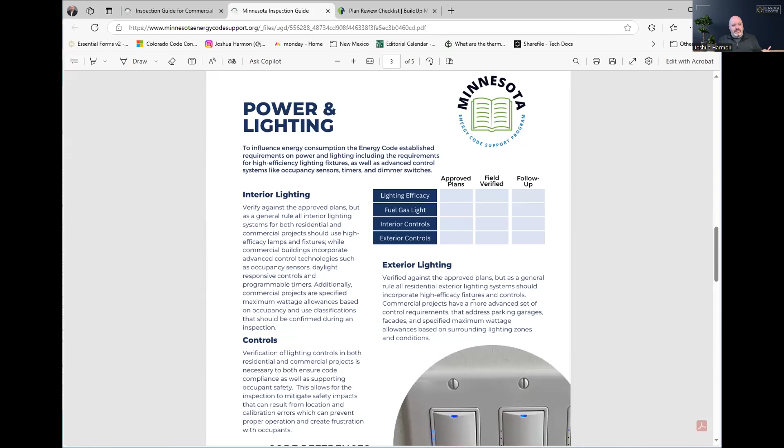But again, there's a variety of different inspection guides. Let's look at this one here - again, the visual inspection guide. This one's specifically for power and lighting, and it would give you some ideas, some things to look for associated with the power and lighting requirements in the code. So the one that I think we will kind of reference - not necessarily go through piece by piece - is going to be this guide here on insulation.

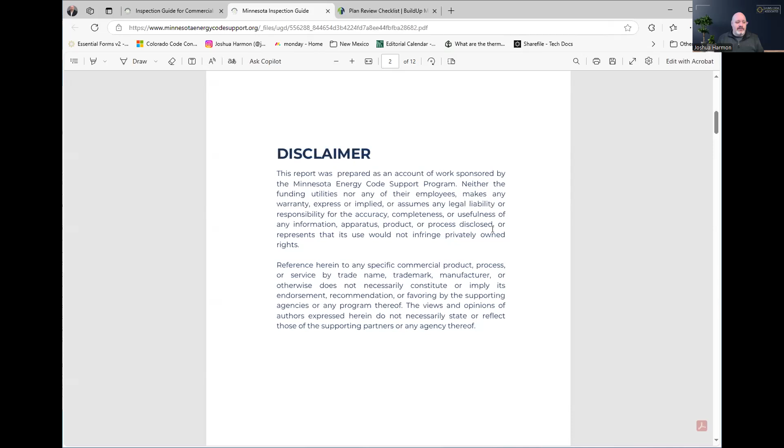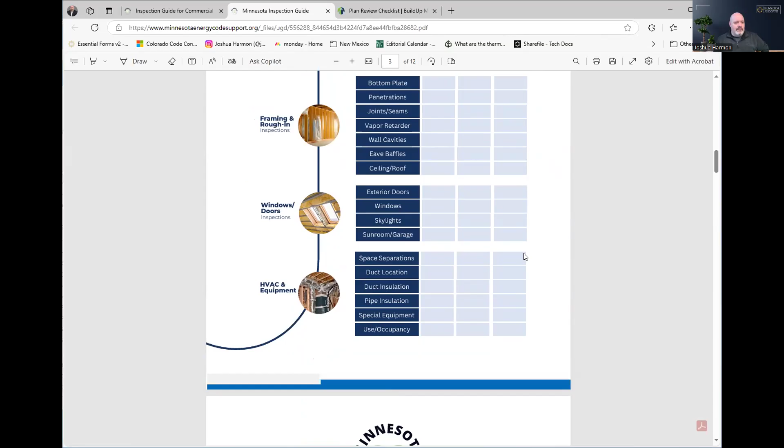Again, that's going to be a document that you can download, you can print off. We are working on getting a handheld, pocket-sized version of the entire series of documents. That way you can have that and take it with you out on inspections, give it to a contractor, so they have a better idea of what you're expecting to see when you're going out to do a foundation inspection or framing. You're looking for the wall cavity or windows, duct insulation, pipe insulation, verifying the use of a space. We've talked about that a few times, and we'll get into that here today, but again, it gives you some ideas of things to look for in that process.

So getting back to what we were here to talk about at the beginning.

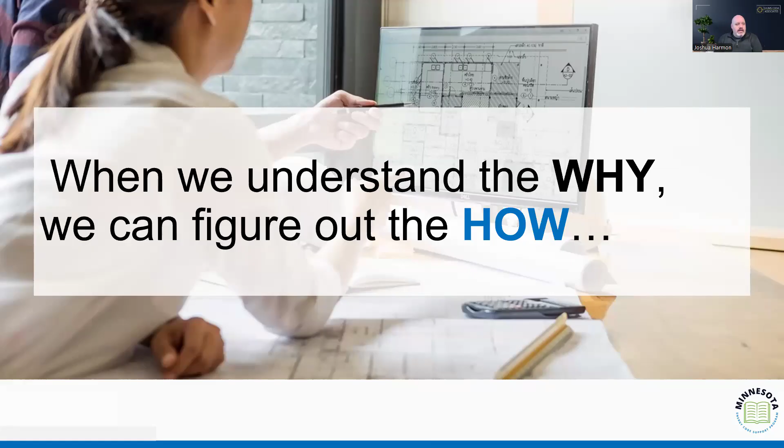One of the things, obviously, you hear me say it all the time - one of the things that we like to do is I like to remind us why we do what we do, right? And recognizing why we do it helps us better accomplish it, whatever the code requires. So when we think about that why, we understand that the reason we have an energy code is because we're looking to control the amount of energy being used, or the amount of heat loss, that's associated with our mechanical systems, illumination expectations, and climate control within our buildings. We're trying to build a building that has that control in it.

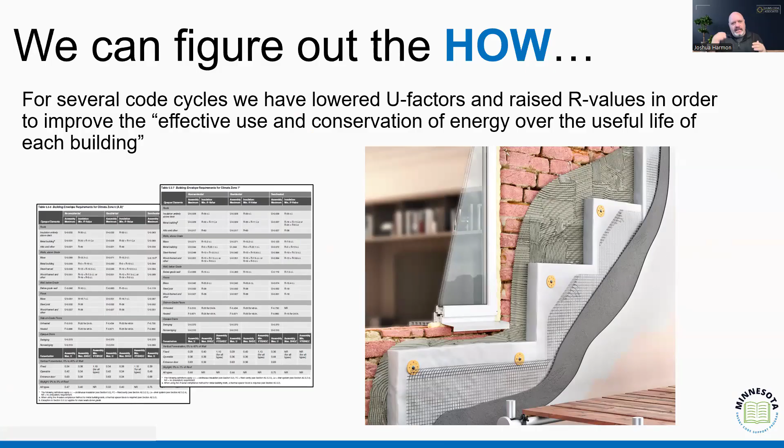And the one thing we always think about every time we talk about energy code, the thing that always gets brought up by home builders associations, by the public, by most code officials, is this concept of insulation - that we keep modifying these and changing the U factors and R values on a table, and that's how we're conserving energy. Well, when you really look at it, and again this is Climate Zone 6, when we look at how the energy code has changed over time, it's not significant when it comes to the amount of insulation we're expecting.

We can see that, again, 38 in the 2009 IECC. By the time we get to the 24 commercial energy code and the 2022 90.1 standard, which I think is going to be the backbone of our future commercial energy code, that number doesn't change. We don't see huge changes. We do see a change from the 18 IECC to 24, from 10 to 20 in our slab insulation. But when we look at all the other variables between the current energy code and the newer version of the 90.1 standard, really the only thing that changes in the insulation is this concept of the mass wall.

Because what we've recognized over time is that it's less a question of what we put in the wall, but how well we put it in there. And it's about making sure from the beginning of the process, from plan review, that we focus in on this concept.

That if you're going to do it - and again, this is something my parents taught me as a kid - if you're going to do something, do it well, right? From the beginning. If you're just going to lackadaisically do a project or do a sport, then don't waste my time. I am probably the worst parent in the world, because that's what I tell my kids to this day - if you don't want to do it, don't waste my time.

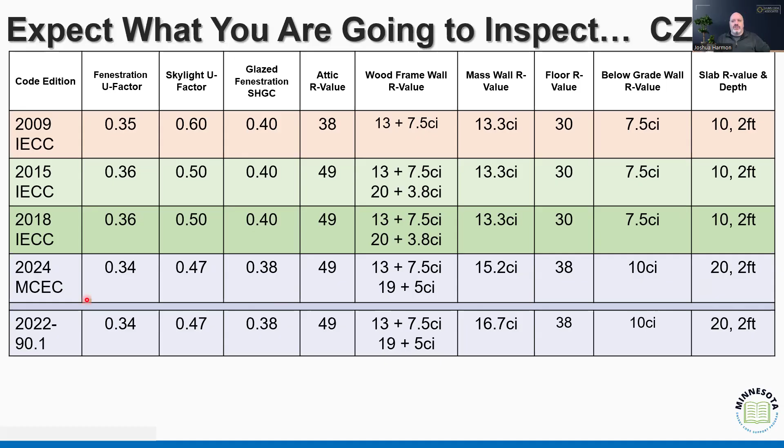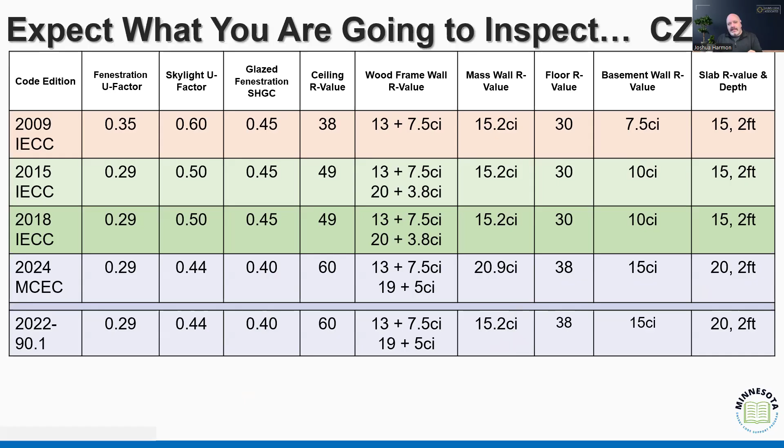So again, the insulation is not so much that we're increasing it, improving it, adding to it. It's that we're expecting the building will better use the energy because we've provided proper control over our conditioned space, right? The window itself does not use energy. The insulation, the drywall, the exterior cladding do not use energy. But what they do is provide that level of control, that level of separation between the exterior environment, which we know can be temperamental, and what we're trying to accomplish inside.

Now, I saw Chris on here earlier, and I keep picking on him, and I apologize for that, Chris. I don't mean to pick on you in this context, but I think the work Chris is doing in the mechanical tag is really the most important thing we do when it comes to the building itself. We stopped arguing about what is a 2x4 and what is a 2x6 years ago. We allow for mechanical designers and our architectural designs to be different, whether we use wood or steel or heavy timbers and those kinds of things.

But the thing that keeps being discussed is the concept of the mechanical system. There's only so much you can do with light bulbs, only so much we can do with switches for lights. But the mechanical system is the one thing that affects our buildings the most, whether residential or commercial. So giving the best control envelope to that building allows us to then have the flexibility to design a mechanical system that heats and cools as we see fit, in the conditions that we want.

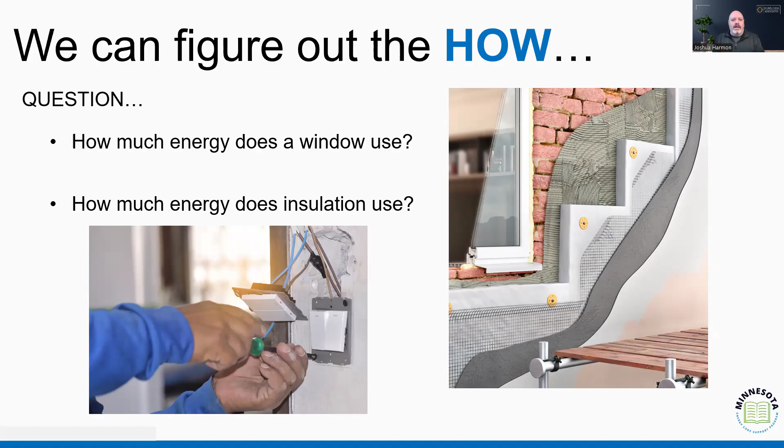And so it is that relationship that makes insulation so important. It's why that building thermal envelope is a pillar of energy code compliance. And when we think about the future of the residential code, again, there's only so much you can do with insulation. There will not be an R100 in the wall. That's not needed—we've seen that in code development. There's a place where diminishing returns kick in. And so we see things coming into alignment to where this is probably the envelope you'll have forever.

And in most projects, that's the reality. So it's really understanding that relationship and where plan review comes into it that I think is the fundamental thing we need to accomplish today. And then, like I said, I have a bunch of slides, so feel free to ask questions. We can jump around, or I'll barrel through it.

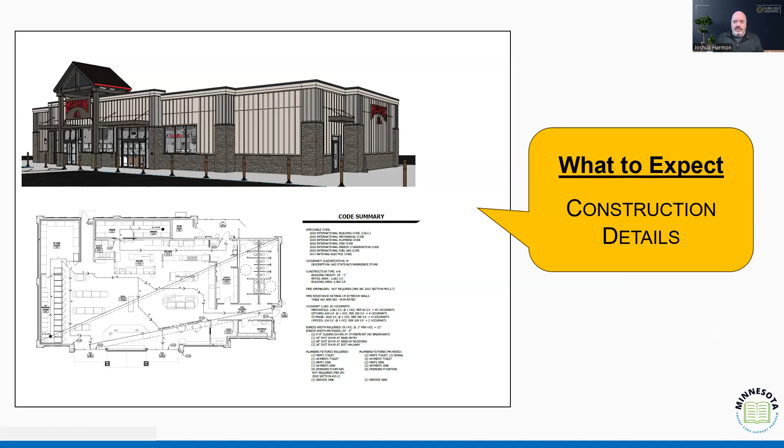So a project starts with this idea of what are we expecting in our construction details. We know the code, whether we look at 1305 or here in 1323, we have certain expectations. Now, one of the things I think fundamentally needs to be reinforced is that we need to identify the testing and testers from the beginning. The code tells us this—this is part of that process.

If I know a test is coming, then I'm going to be prepared for it. If I know what that test is, then I can think about it. If I know who's doing it, I know when to call and who to call. So these are concepts that we understand. And as plans examiners, that's one of the opportunities for us to say, what is the standard we're testing against? Not just, yeah, we've picked this firm to do our testing—well, what testing are they doing? Is it matching it with a table or matching it with the energy code, as far as maybe something as simple as air changes per hour?

Or is there another standard that we're using? Is it a 380? Is it an 850? Is it a RESNET, an ICC, is it an ANSI? And what is it that we're actually testing against?

Now, I've told you before, my wife is a teacher, and one of the things we talk about all the time is not just testing to test, but testing with a target in mind. What is the outcome that you want, and how do we get to it? And so again, that's where we see this role as fundamental in the beginning of plan review.

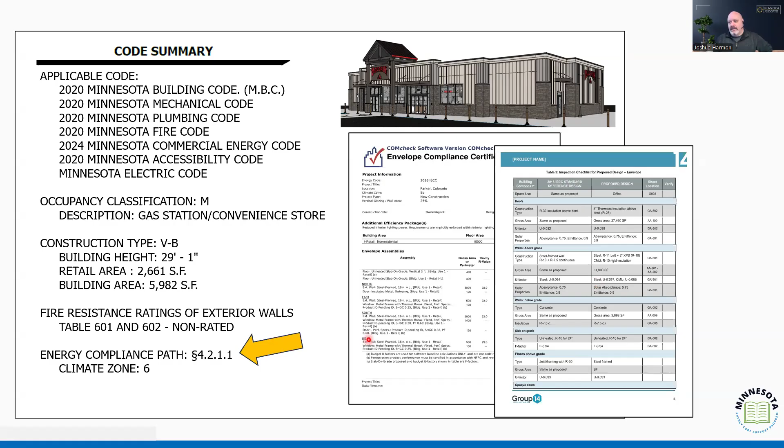So I start to question things. And one of the things I will always send a comment back on is making sure I have adequate understanding of the compliance path. Please specify that compliance path, because I'm basing this review on a prescriptive compliance using the R value for your envelope compliance. If that's not correct, you need to make that correction for me, because that's what I'm assuming, since I don't have all of the details in this. This just tells me there are compliance paths.

We saw that section here, 4.2.1.1. You're just telling me it's a new building. That's all you're telling me with this number. So I'm going to need that extra little bit of information.

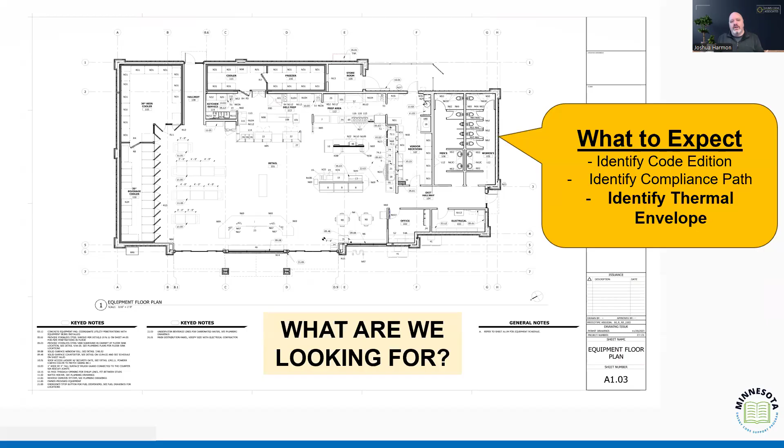So once we've gotten in, after we've passed beyond the compliance path, now we start to identify that thermal envelope. And what are we going to be looking for? There are certain things we've talked about, things we know we're looking for in insulation related components. The first thing we're looking for is that envelope location, because we're going to see that envelope may be very simple or it may be very complex.

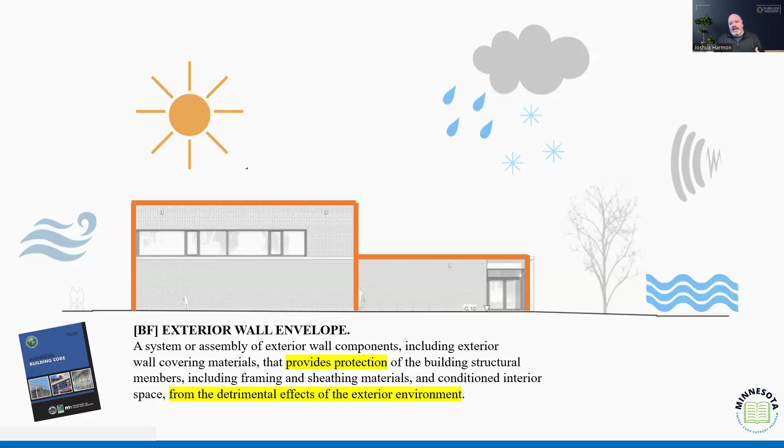Now, that envelope is defined by the building code. The exterior wall envelope is designed to protect us from the detriments of the exterior environment. That's the envelope we talk about, the wall envelope that protects us from rain, from snow, from the wind. When we go to the energy code, that's when we take it that extra step further. And I hate the term building envelope. I prefer the term thermal envelope.

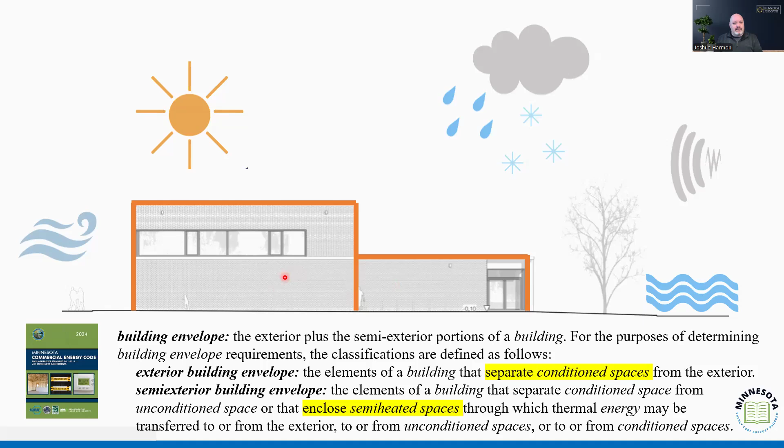You'll hear me say it a million times that way, because it's a thermal envelope that allows us to separate conditioned spaces. So if I have a conditioned space versus a warehouse that's semi-heated, that thermal wall, that thermal barrier, that thermal envelope separates the two and allows me to have control over what's going on. When we look at a large building, the building envelope is that structural component that separates and carries loads and separates exterior from interior spaces, occupiable or potentially habitable space. That thermal envelope is going to separate it even further into what is conditioned and what is not, and how am I controlling these things?

Because what we'll see in the code tells us that we need to recognize and separate these things. But more importantly, it gives you, as the building official, the authority to say yes, this is a semi-heated space, this is an unconditioned space. It's not just you said it, I have to agree to it, because I need to know what it is. Because if I don't have that level of control, we all know what happens.

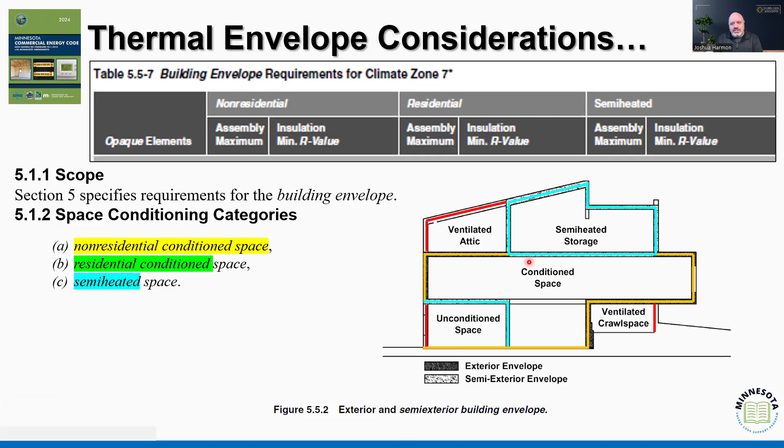So again, we may have a building that has different types of conditioning, and that's where the thermal envelope is important to understand. Beyond that, it also allows us to recognize different types of functions within our designs, right? We know that if a system is completely within the building's thermal envelope, then we have relaxed expectations regarding the insulation of the duct systems, regarding the duct leakage associated with the duct systems, right?

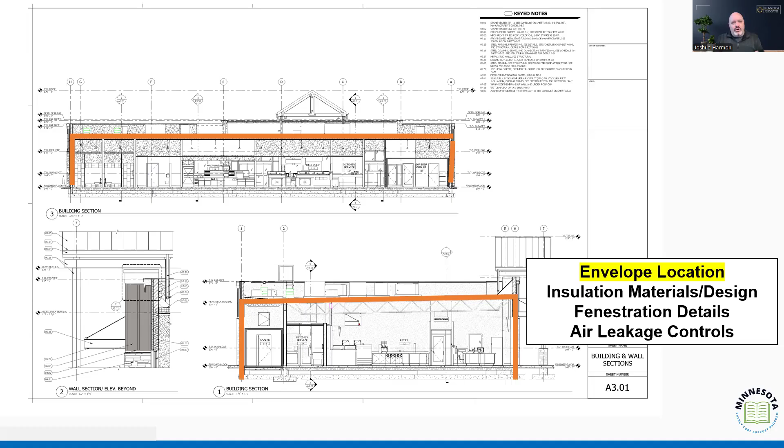If this envelope dips down, curves around, does some things, now I need to start thinking about things. Where are my different components? Where are my sprinklers in relation to this thermal envelope, right? And so again, I need to know where that envelope is going to be. After knowing the envelope, I need to start thinking about what makes the envelope, right? Now, I do want to point out that the code addresses envelope alterations, right?

Is a parking garage considered a semi-heated space? That's the beauty of this code, right? That's up to you, right? Because the space, I'm going to go to the one that's actually got the state seal next to it, may be designated as either semi-heated or an unconditioned space only if approved by the building official. So again, depending on what they're trying to accomplish in that space, it may not be, right?

You may have an environment where you're going to have a little bit of controlled heating. I typically see most places have a semi-heated. They have a sprinkler system down there. They need to maintain, again, above freezing, right? And so you may have parking garages that qualify. It just depends on the scenario, and that's why it gives you the authority to say this is conditioned or semi-heated space. It may be a completely different zone as well.

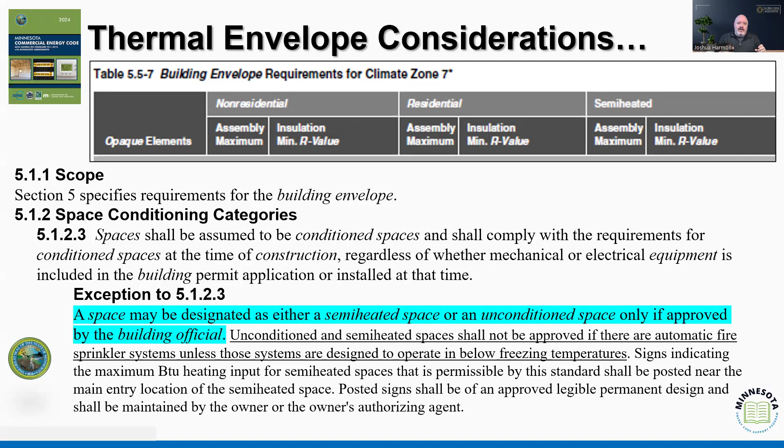You may call it conditioned, and it's just not conditioned to 65 or 68 degrees, right? You may identify it that way. But again, that's where the beauty of the system is, that you make that determination, and in the design, they're making that claim, right? Otherwise, I would treat it based on what's going on in it. Is this just a parking garage that goes below, and then there's no access, or is there access?

Well, this is going to have some kind of an access area, and so we're going to have stairs. We may have some storage. We may have some things down there. So this would, for me, probably be a semi-heated space up to a certain degree, and maybe there's an overhead door. I was in Arizona last week, and when I went to a parking garage, they had the overhead door, right?

If you go to the Hilton down in St. Paul, they've got an overhead door that's not just a chain; it's actually acrylic panels to create a semi-heated space, right? So that would be a semi-heated space. Digression. Good question. Answer live.

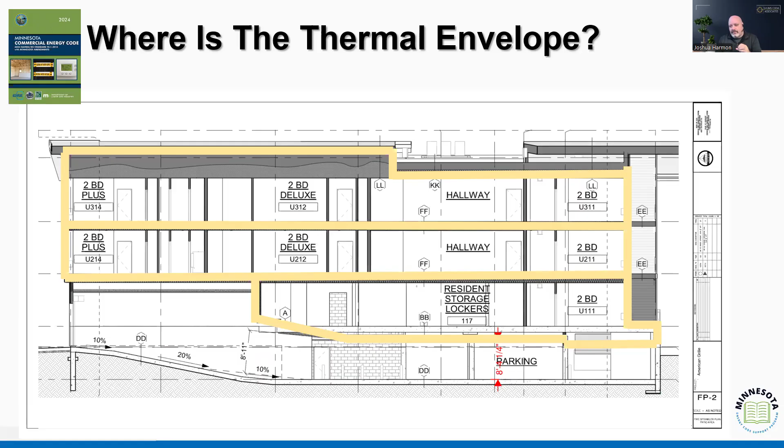So when we start thinking about that in that context, remember there are certain things that we can make alterations to. The code identifies that alterations shall comply with the requirements of Section 5 for the insulation, the air leakage, and the fenestration applicable to that. I had a building heated to about 45, 50 degrees with precast concrete above. What would you ask for to separate the garage from the residential units above? So what I would tend to think, yes, there was. Let me grab this here.

I think again, it would be some level of vapor barrier, right? Maybe the thermal envelope has to go across. If we look at what the table says, we'll zoom in. You're in 6, right? So that floor would require an R38 to separate the parking garage from.

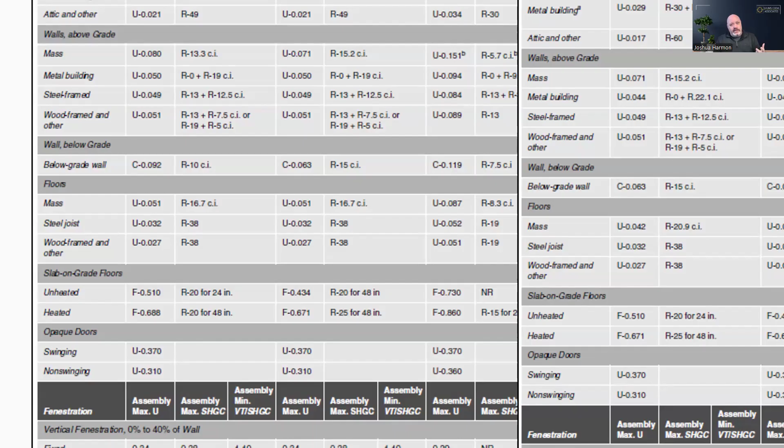Now you might be able to get into, again, an unheated, you might be able to go with this U factor or a C factor, because we're talking about concrete, right? And so you might be able to get a thermal rating on the concrete plus some level of rigid foam insulation to provide a level of separation.

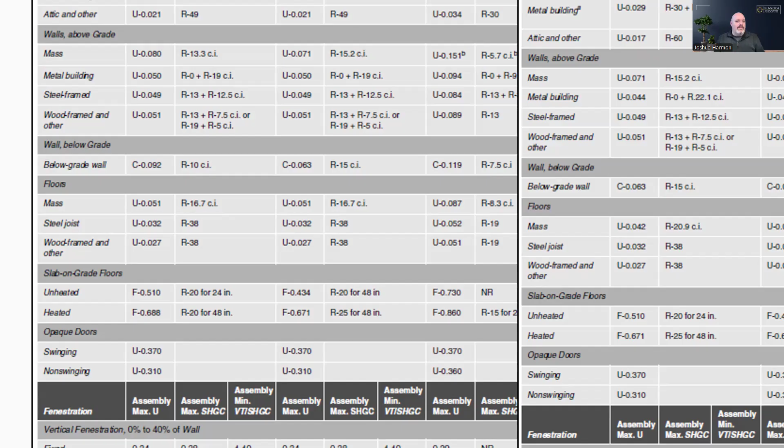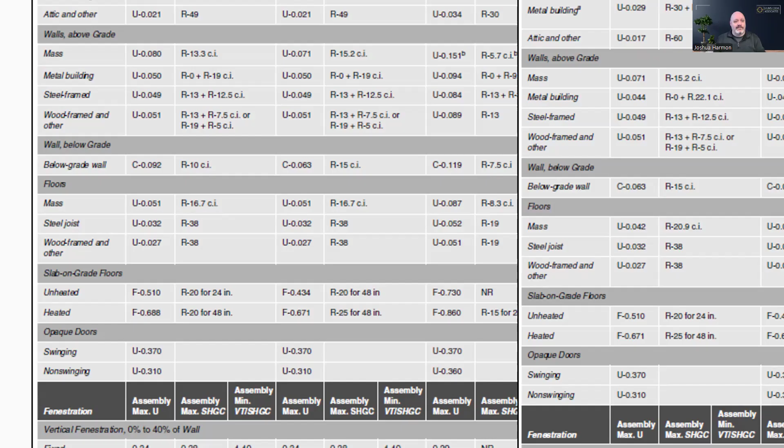If you don't get that, that's why you see in some parking garages the stalactites start to form where the moisture is dripping through because they didn't provide proper thermal separation. And then that water, as we all know, will eventually freeze and crack and delaminate or spall that concrete. And again, I've been the guy on the other side of the parking lot who gets presents every once in a while in my city vehicle.

Trish, did you have a question? I've unmuted you. If you figure out the thing, jump in anytime you have a question.

But yeah, so that's what I would say, Clint. I want to see what is the thermal resistance of that precast concrete, I want to see what is your vapor barrier that's going to prevent moisture from accumulating between that semi-heated space and that heated space that's coming from the concrete, right? Because that concrete's going to get natural conductive heat.

Now you may put some level of thermal barrier at the top of it to try to, I use the term shunt, right? When we think about the heated slabs, when we talk about heated slab on grade, the code requires that we also include, and I've got it in one of these slides, that R5 continuous insulation underneath it, right? That R5 is not preventing heat diffusion into the ground, but it's going to attempt to redirect and shunt it up. Over time, you're still going to lose heat to that situation.

Oh, okay. No problem.

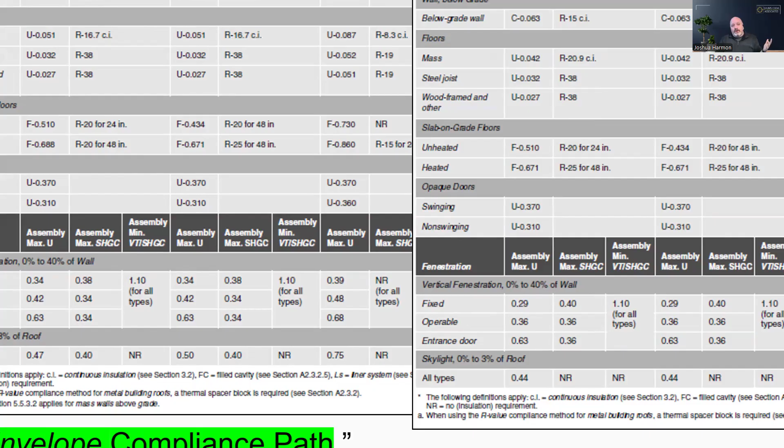So again, that's how I would deal with it from a thermal envelope perspective. And we've got a couple different examples. If you need one, we've got a 5-story multifamily with underground parking for each unit and how they did that and what those expectations were on those designs. But again, if we're looking at an alteration to the envelope, it may require that we look at insulation, fenestrations, and air leakage as part of that alteration.

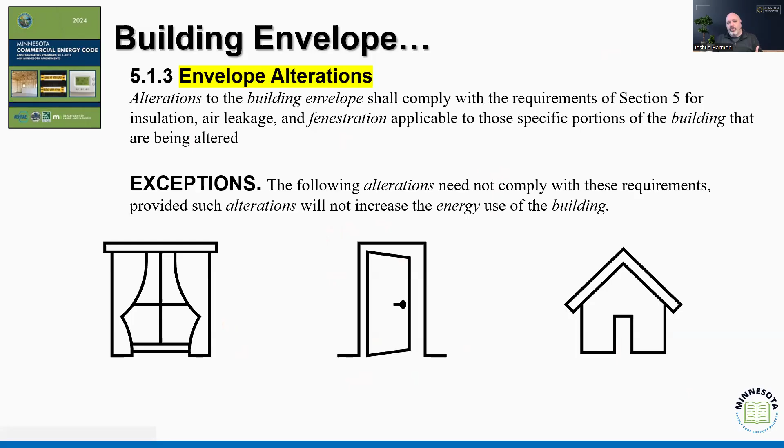But the code always gives us exceptions, right? It says that the following types of alterations need not comply with requirements for alterations when they do not increase the energy use. That's going to be replacing windows, replacing doors, and certain types of envelope alterations. Those exceptions include the installation of storm windows, replacing glazing using an existing sash, and replacing fenestration where we're not exceeding 25% of total fenestration area, right?

So there's certain things that we can do, but if we're going to go all in and replace all the exterior windows, or we had a car run into your building and now you have a hole. Guess what? You're going to have to repair it, right? And then we're going to have to think about what type of window you're putting in. Make sure that window meets the requirements of the code.

One of the things I had the biggest problem with, and I've used this example before, in the city building I worked in, my office window had a crack. When they went to replace that window, it no longer looked like the other windows because it was installed based on the new code. Everybody else had this nice dark tint, and then I had the shiny silver one right in the middle, right?

What about the dwelling unit over the overhead garage door? So Dale, I would probably say we would be looking at what type of door controls are there. You can get with the door manufacturer. And so you're going to extend that thermal envelope over the sill, over the top plate, and then go back up that wall. So that overhead door should exist underneath our continuous thermal envelope, right? So if we think about it that way, my envelope is here.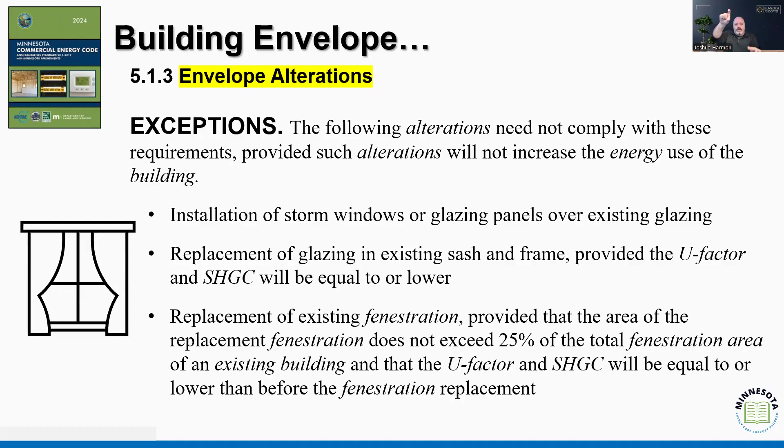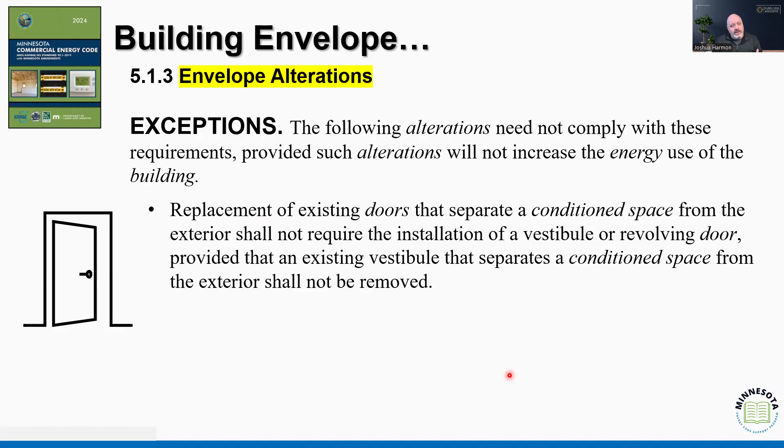So we've got the window, we've got the door, right? Replacement of existing doors that separate conditioned space from the exterior shall not require the installation of a vestibule or revolving door as long as that existing vestibule separates the conditioned space from the exterior, right? So again, just replacing a door doesn't mean we got to install a vestibule, right? I go with the word common sense. We use very little of it in the building code. This is one of those little pieces.

So that third option is, again, when we start talking about alterations to the roof, the wall, or the floor cavities, right? If we take the siding off and we don't create a cavity, we don't have to install insulation to fill that cavity, right? If we're doing a membrane where there is no cavity to fill, then we can't fill a cavity, right? If I'm doing a roof recovering, I don't need to do anything. If I'm replacing that roof and now I'm exposing areas that would otherwise require insulation, then I would maybe require that insulation. It gives you the ability to have that exception.

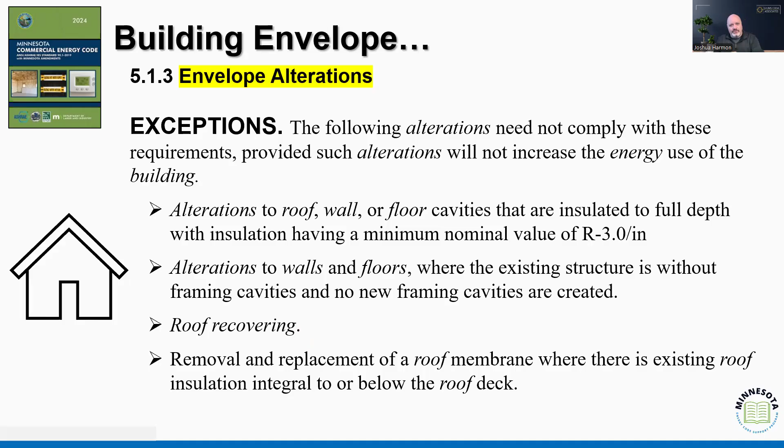That's the more important part. You have the ability to grant exceptions to alterations associated with the building envelope. There are going to be 100 different reasons why you would or wouldn't, and the code says you figure it out. Does it fit within the confines of one of these identified exceptions? So I threw that in there just to get everybody riled up. That's what I like to do.

You know me. And so with our building thermal envelope, obviously there are mandatory provisions. We know that we have to follow these mandatory provisions. The first one is insulation, and it tells us that we got to install it to the requirements of the table, right? And then it gets to the fenestrations and doors. We know that's part of our overall thermal envelope. We'll talk about that later. Air leakage is going to be another conversation. But insulation in and of itself sounds like a simple concept: you have to have insulation that meets the requirements of the table.

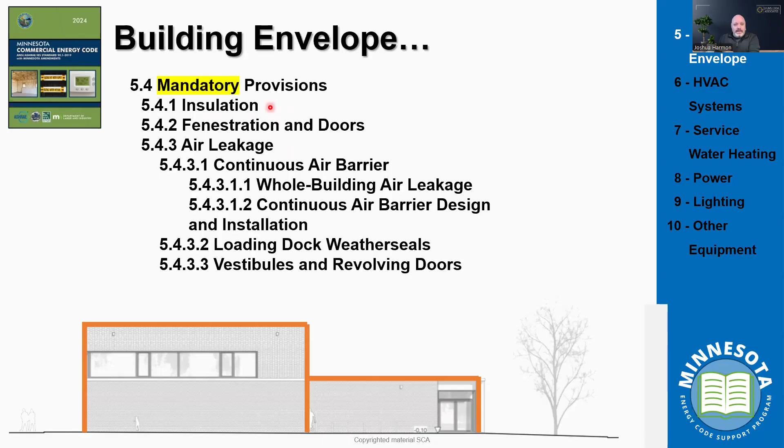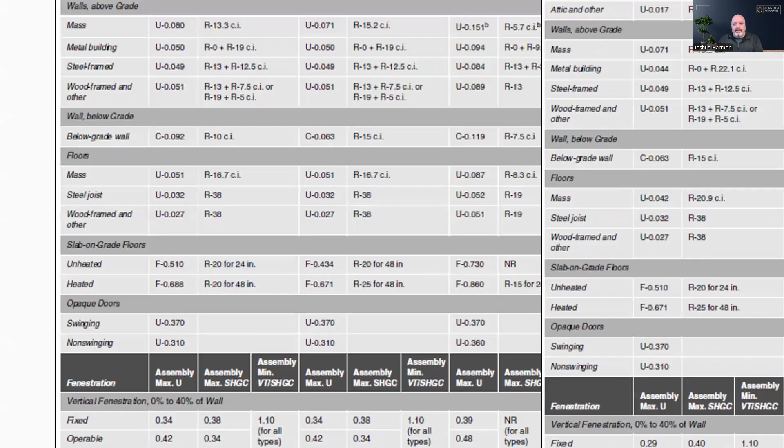That is done through either the prescriptive compliance path, right? Follow the table, or the building trade-off path. And that prescriptive path is, again, follow the table. Jump into it and say, okay, you're going to have a steel frame, a steel joist floor. I need an R38. If you're going to have a mass floor, if I've got a concrete floor, then I need an R16.7 continuous or a U-factor of 0.051, right?

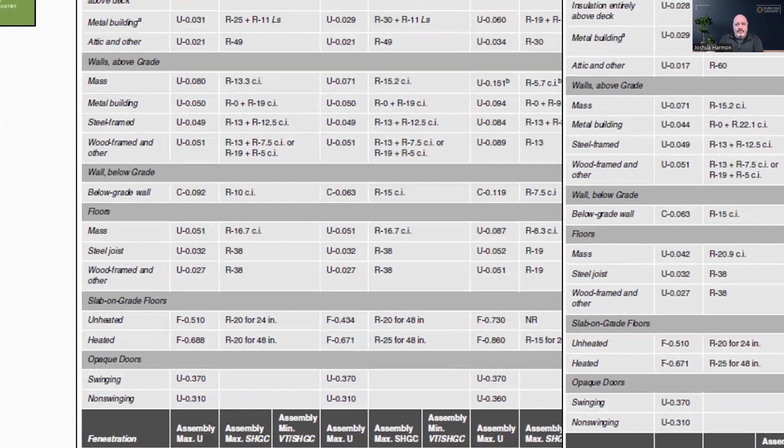One thing that I would always suggest, and we'll talk about it here in a second, is jumping to some of the different manufacturers. If it's precast concrete, they know exactly what the U-factor is, right? That's what makes them an association. When we start thinking about what's identified within the code, it's these components: the roofs, the walls above grade, the walls below grade, the floors, the slabs, the doors, the fixed fenestrations, and the skylights. And then we start to isolate within them that concept of attic or other.

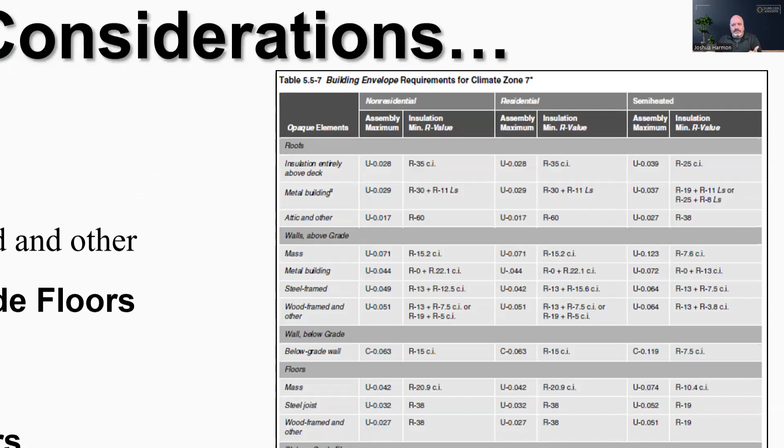If it's not a metal building, which we talked about a month ago, which was metal skin with metal siding, metal skin with metal framing equals metal building and heavy metal, right? So if we have a metal building, we have expectations, and we know what those are. That's going to require that liner, right? That R30 plus an R11 liner, because we need that liner for thermal separation.

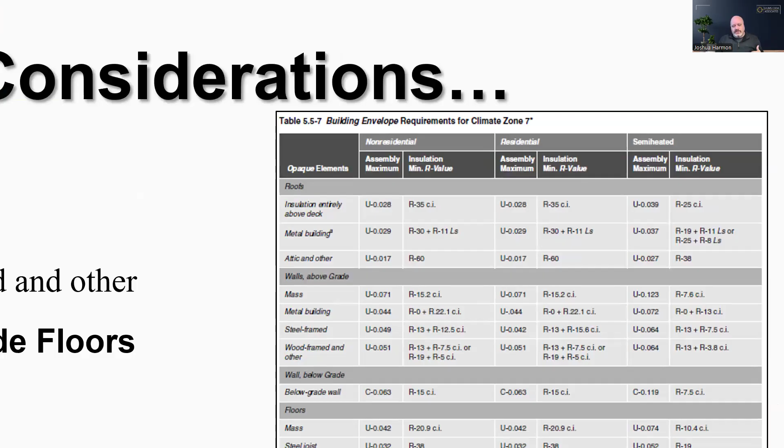If we have that insulation entirely above the deck, that gives us a whole other number, right? We're usually, I think that's an R30 for most, 35 in zone 7, 30 in zone 6, right? And then we have the attic or other.

So again, we would take those different components and say, what are those components supposed to be? Prescriptively, the table says I need this number, either as a U factor or an R value. That alternative trade-off compliance path is the ComCheck or other.

Calculation for area-weighted U values, right? ComCheck is literally just going to take the math and do the math for you, saying this is the type of wall, this is what you're putting on it, what is that thermal envelope U factor, right? That assembly U factor. And then it weights it.

I think that's one of the things to make sure we understand. When we calculate an R value, it's individual, one piece of material. The U factor looks at the entire wall system and then averages cavity versus window versus stud, right?

Same thing here. So your percentage of window may be different in a different wall assembly. That's why when you look at your ComCheck, it has a wall system and it also has a window. Or you may have an elevation that has no windows. Great, right? That's what we're looking at. That's what this is doing.

All that math to say overall, this building will have an area weighted based on the amount of wall versus window versus other component, an area weighted U factor of X compared to our tables, right? So again, this is that alternative.

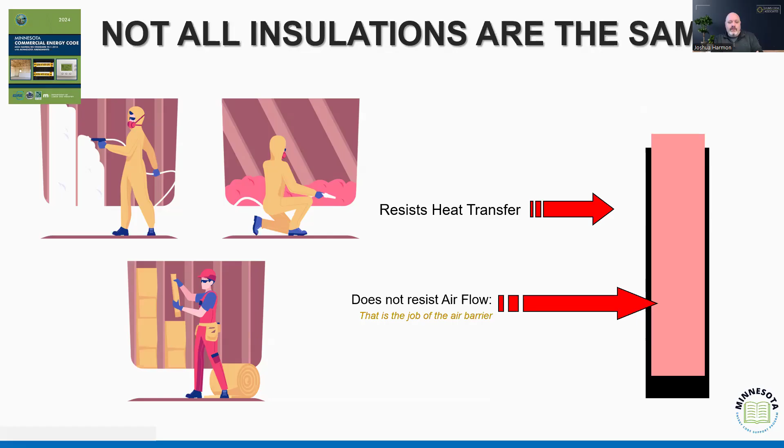And so the reason we have these alternatives is because we understand that not all insulation is the same, right? It all does the basic concepts of resisting heat transfer, but not all insulation provides air control, right? That's why sometimes we need an air barrier or a moisture barrier, right? And then sometimes we don't because of the selection of material.

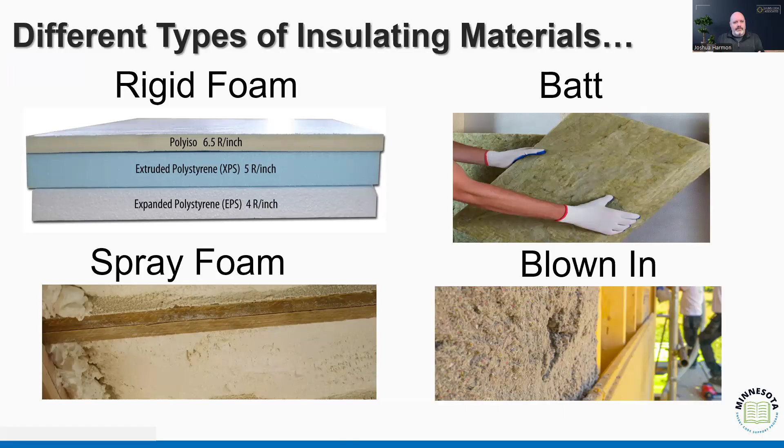Because different types of material, like our rigid foam, spray foams, batt and blown, provide different qualities, not qualifications, qualities, right? They're measured differently. There are different ways to measure. We can look at it as an individual R value, right? We can take the assembly as a whole using a U factor. Either way, we can calculate what is that thermal resistance, how much heat goes through this material over time.

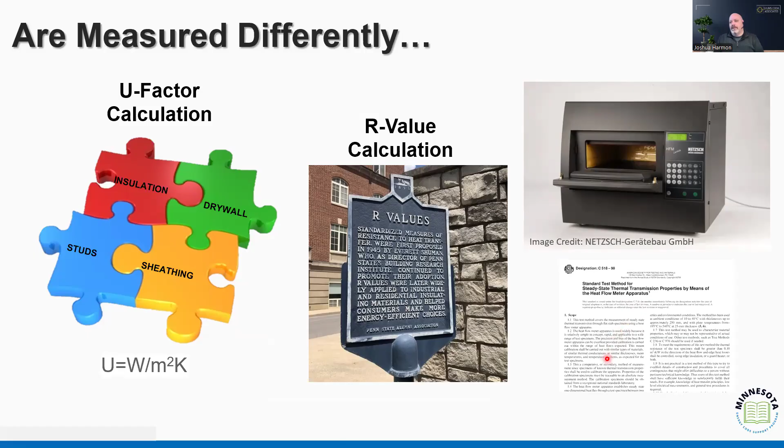And they do that through this little thermal transmission system, autoclave process, right? They can stick the material in, they run the computer, they run it based on the standard and say this much heat transfers in per inch over this time period. That's how we get that R value and the relative U factor.

These values can be measured. You can do this on the computer. You can do this with a book, with a piece of paper, right? We've talked about this before. The method of calculation is we're looking at all of these different assemblies, right?

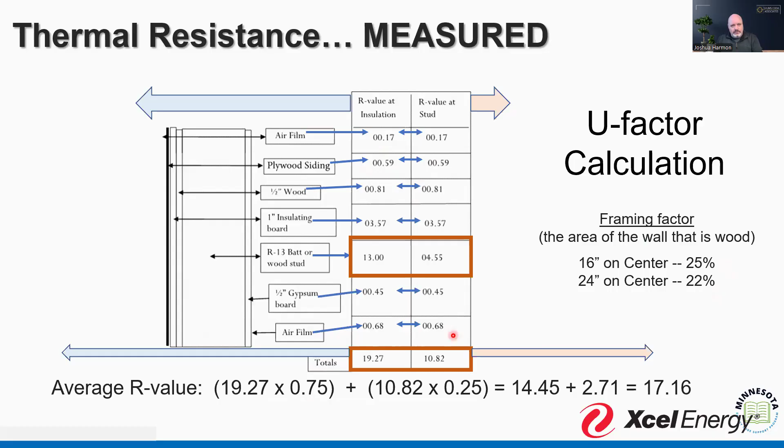If we're doing 16 on center or 24 advanced framing on 24 on center, that changes our framing factor, right? And that affects how much is wood, how much is wall, right? I got those back, wood, wall. And that gets us to a number.

Then we get down to this. So using that simple example of a 3.5 and a 13, we get a 0.058. Well, then we can start playing with it. We can start replacing that batt insulation, that number. And so if we increase it from 13 to 15, then we can see how that relative U factor goes down. So more insulation, less heat loss.

So this is thermal resistance. This is thermal loss. So the more we have, I usually say this, the bigger I get, the less I lose heat, right? So I'm going for a record here. But I can replace that R value in the cavity and see the impact. So we see here we got an R20. I'm going to use this as an example. R20 and 3.5 gets me to a 0.045.

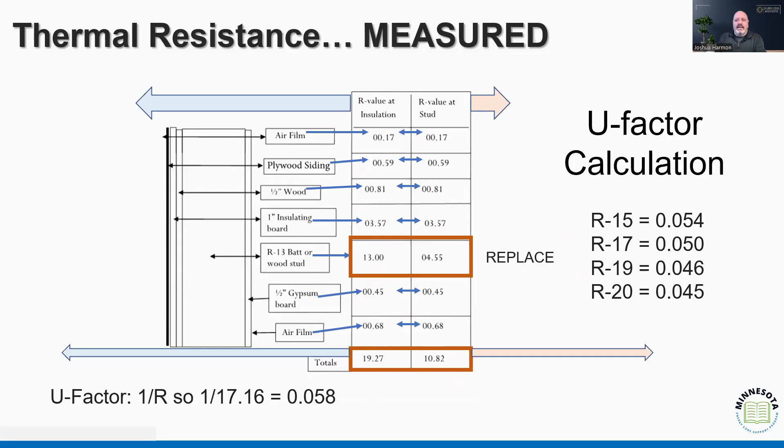You can also go the opposite direction and say, okay, keep your R13 batt insulation, just change the insulation board, the continuous insulation. And so we can start to change that number. If we go to an R10, we actually get more thermal resistance than if we went to an R20 in the back. So adding 7 here is roughly equivalent to adding 7 down there, in this particular design.

Let's say I'm designing or thinking about what I'm trying to do. I can go back to my table and say, this is a wood frame wall. I can either do 13 with 7.5 continuous, or I could do 19 with 5. If I'd gone with my 20 plus 3.5 from a prescriptive requirement, from an R value calculation, I still wouldn't pass. But I would be under the maximum assembly U factor.

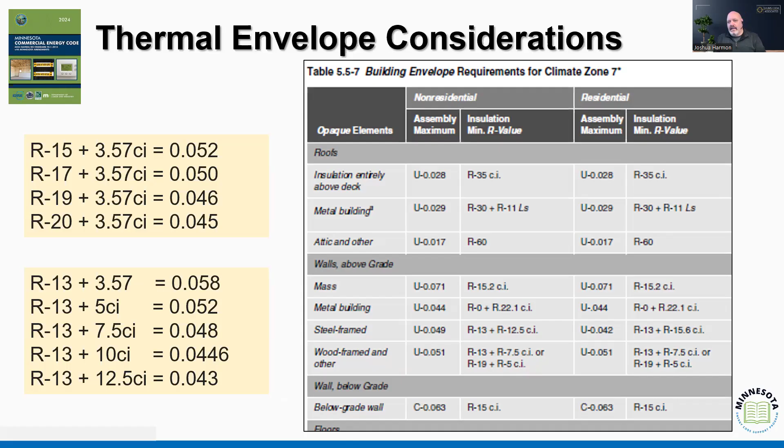So again, that gives me that flexibility. I can choose either the U factor or the R value, whichever one gets me into compliance. And again, those values are accomplishing the same thing. They're looking at how much heat is transferring through that material. And remember, not all insulation is the same.

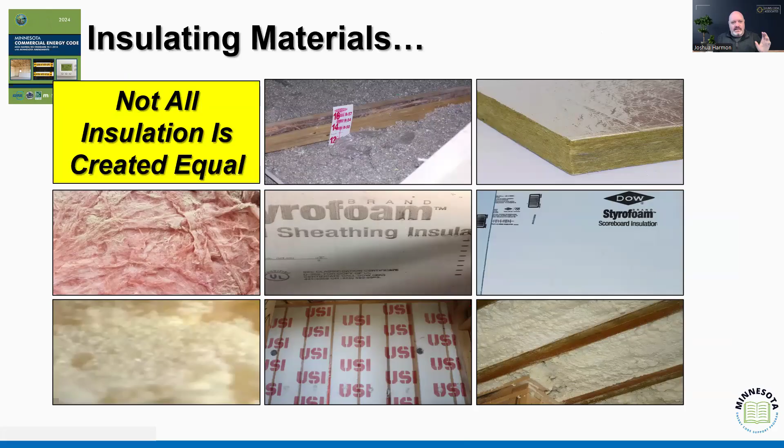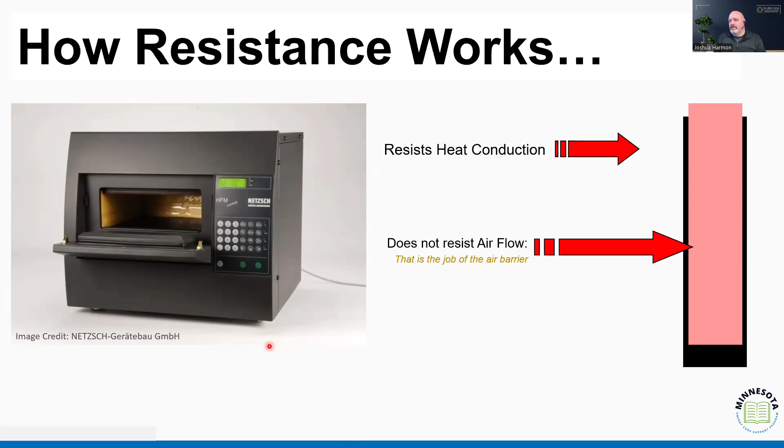Again, it has to be tested. And when we look at that testing process, I think it's important to understand that we can look at the testing parameters the same way we do with an ES report, or any other material that we start to evaluate. What was the evaluation report on this? What was it testing? Is this material going to perform the way we expect it to? Manufacturers provide a bunch of technical resources to assist in that calculation.

Again, if we're doing precast concrete, the Concrete Association will have that. ACI sent in my state a big, huge thing about how we need to incorporate fiberglass tensile fibers mixed in the concrete, because it provides added tensile strength and a level of thermal resistance. So the association generated the material that then we can evaluate and say, does this make sense in the best interest of our communities.

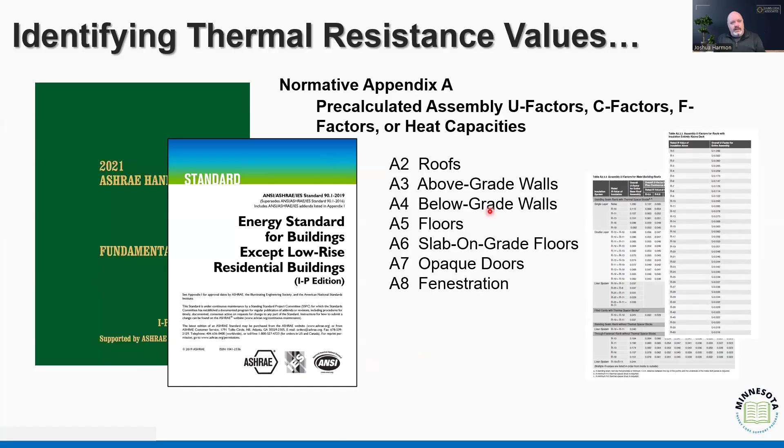So you can look at those resources. You can also identify resistance values through the standard itself. Go back to Appendix A. It's got a list of pre-calculated assemblies. So maybe there is a floor system that incorporates the thickness of the concrete, and again the addition of maybe some air barriers or foam board insulation. But remember, each one of these different materials has a different expectation, different qualities that may make it more valuable in a particular design.

And so that's where, as a plans examiner, I need to know what's going on. We're not just saying throw an R19 in the wall. What are you telling me, R19 insulation, or are you telling me R19 batt or R19 continuous? Because you, as a designer, may be thinking about multiple things, and I just can't say well, as long as it's a 19, we're good. I want to make sure that what my design is allowing is what my inspector is able to see and accomplish out in the field.

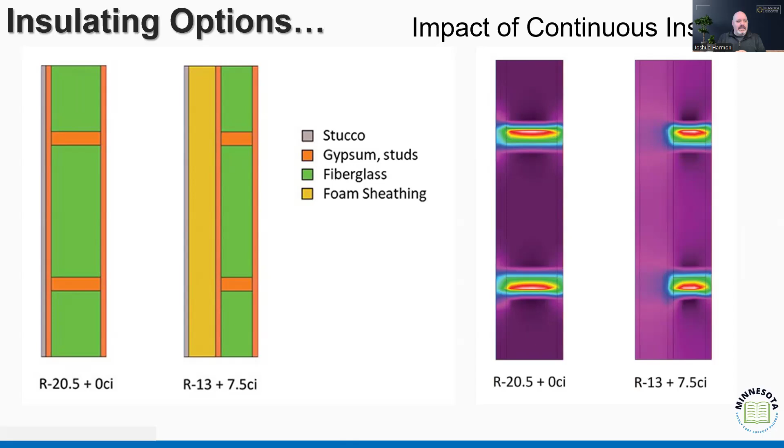And again, spray foam, we know there's different types, whether they're low density, medium density, high density. Low density is what we call open cell. Over time, it cures a little slower, so it opens up the cell and the gases evaporate, which then allows it to be filled in with air, making it less air impermeable. You can still get a good air barrier, but you have to install more of it than if you go with a closed cell. A closed cell cures faster, so it traps the gas inside the cell, and therefore you have that information. Are they not equal?

So the R factor and U factor are generally the same. Eugene, because the question is whether you use the R factor or the U factor calculations, are they not equal? The R value is looking at one piece of the pie. The U factor is looking at the whole pie. And so if I use the example of Taco Bell tacos, am I looking at the meat or am I looking at the taco? It's still meat in there, but am I getting the whole taco?

And how much better is the whole taco than just the meat, right? So they are somewhat related.

Now, the R value is what comes first. The U factor is a mathematical inversion of it, right? Except you're allowing that area weighted component. You're understanding this is part of an assembly versus an individual material.

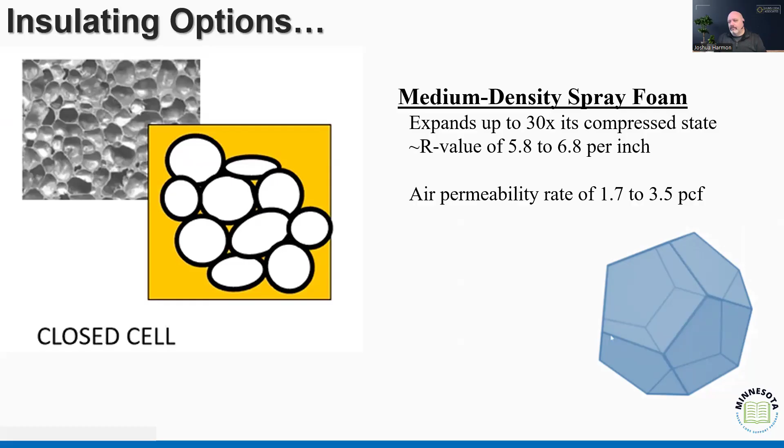So again, depending on what type of material, we want to make sure we understand, are we doing closed cell, open cell? They are different. They don't just taste different, they are different, right? And again, spray foam is something people are really trying to get a lot of because it has different versatilities that they may find more useful. But again, if it's looking to just be an easy filler for maybe a small area that doesn't want to be stuffed with batt, or as part of an air resistive or water resistive barrier.

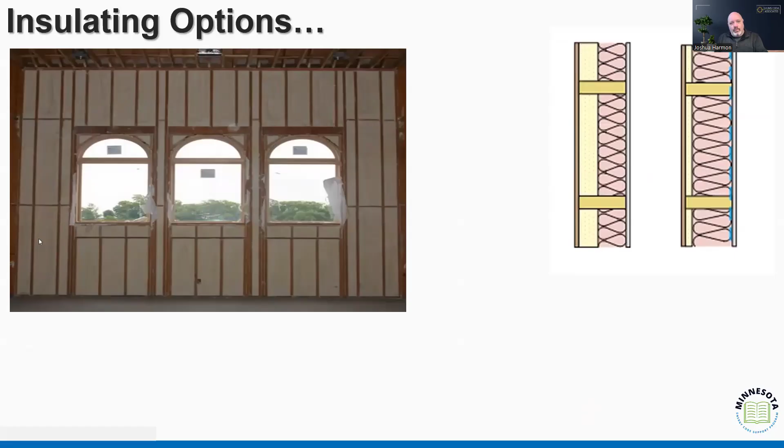Again, we need to understand those things so that we understand it has to be installed the way we've approved it, so that again it all comes out and is successful on the other side. What we don't want is, well, they said they were going to put in this, and we don't understand that this is going to be part of the air barrier. We allow them to go, hey, well, they just put in an R19 batt, we're good. And then the building leaks and it affects how the mechanical systems work, how the blower door works. All those things fail because we changed out, without contacting the designer, some of that material, right?

It's where we're getting to that place of do it right, and that way we don't have problems. And if we want to make changes, then double check. Make sure the architect's okay with it. Make sure the design is okay with it. Make sure that it doesn't, again, perform more than one function. It might only be just insulation, and that's fine. But make sure we understand what it's part of - that's really my plea.

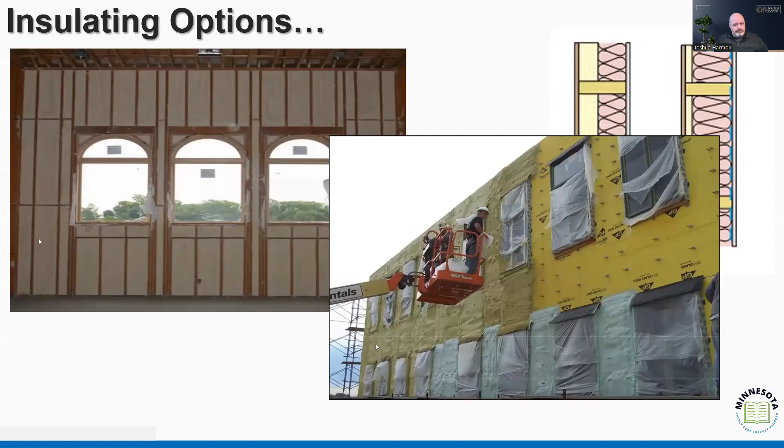Same thing with blown insulation. We know a variety of blown insulations have to have certificates associated with their installation, as well as expectations for how we install batt insulation. And when we see the integration of other building systems like insulated concrete forms or structural insulated panels, what are we getting on site and how is that going to match?

Right? I could see where we might have a structure that wants an insulated panel to serve as, because it might be easier, cheaper, and faster to buy, right? Or like I saw this at the RESNET conference last week - this is an insulated foam board that also has structural sheathing capabilities.

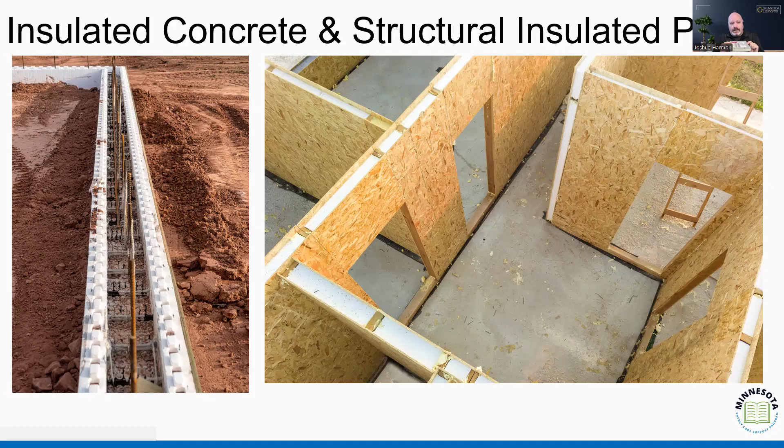So this is an R6 per inch, right? So that's R6 per inch right there. So you could go with R6 with a structural sheathing, and then have an R6 without the sheathing, and have R12 on the exterior wall, right? And then you can nail through it. They gave you the list of different fasteners and how deep those fasteners can go in order to get to that metal superstructure. So again, I think you have versatility that sometimes we say, well, this is just being controlling. No, it's controlling the building, not your design or what we're expecting the building to look like.

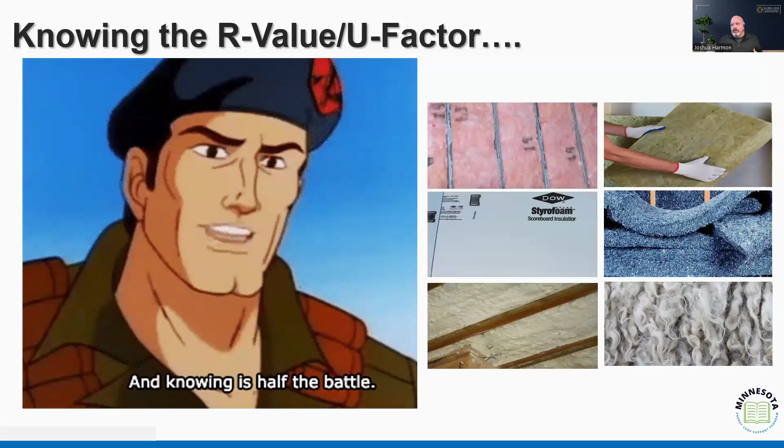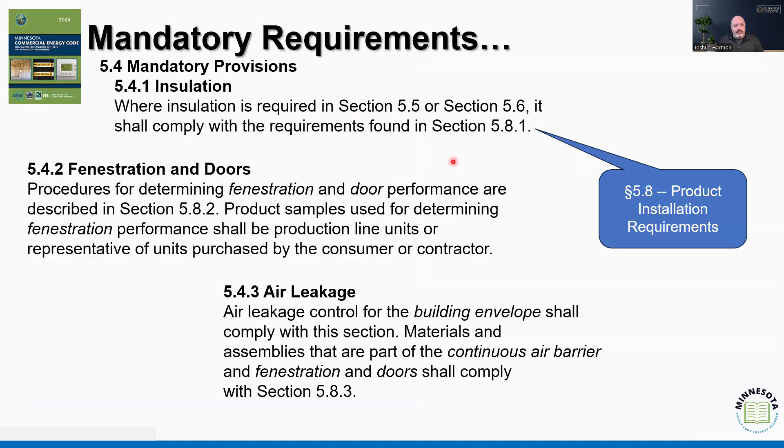So again, knowing that R value, knowing that U factor, is half the battle, right? Knowing that it's there and what my contractor is going to be doing, what my inspector is going to be looking for, is half the battle for me as a plans examiner. The other half is making sure that we follow the manufacturer's installation instructions and that we provide those instructions, right? That other side is either meet the tables and then comply with the installation expectations. So what does that manufacturer say is supposed to be done? What is that testing methodology going to be?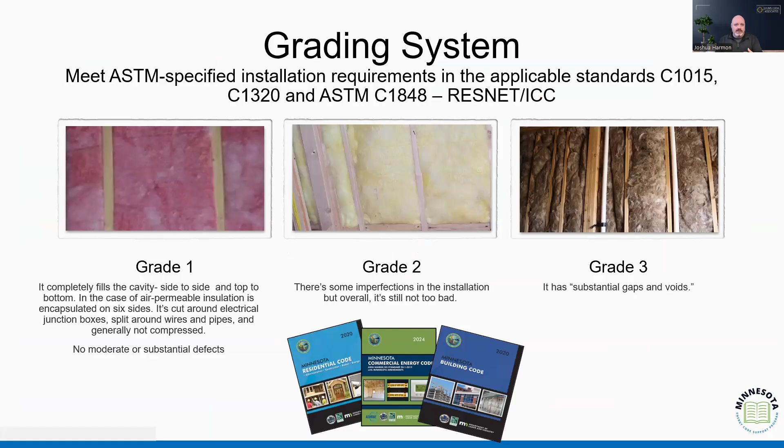Are we going to be using a grading system? What are those different expectations, right? We know that the code adds in or modifies some of those other prescriptive requirements.

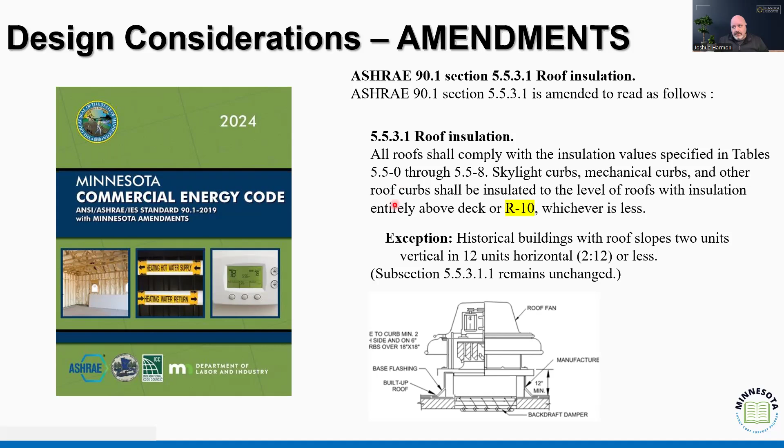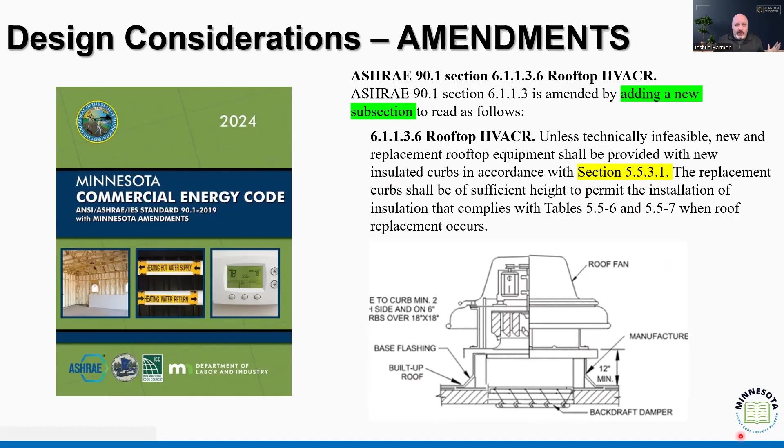Installation expectations, right? Where we increase from an R5 to R10 for roof curb insulation. We see that both in 5.5 for thermal envelope under the prescriptive path, as well as 6.1.1. Now, one thing I'll point out, this is in 5.5.3.1, and this is a prescriptive response. If I choose to go with the simulated performance or one of those other performance paths, this technically no longer applies, right? Which is why we see it added again in section 6 for the mechanical systems, because we want to make sure that those curbs take into account long-term needs of that roof structure. But again, there might be things that we think are going to happen, but if we choose a different path, they go out the window, because all these systems are reflected in those different designs.

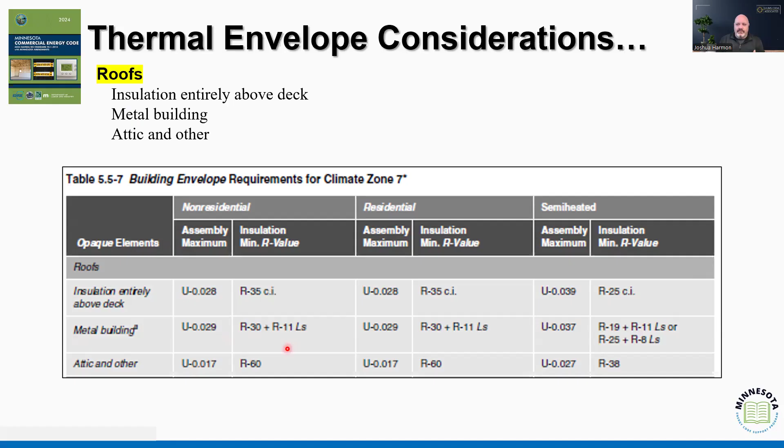I'm going to jump through these next ones because we don't have time. But for those of you that have the slides, when I send them back out, they break them down section by section, so you can see that I just used Climate Zone 7, the different values associated with each of these.

That's weird. I've never lost Teams before. I apologize for that, everybody. I don't know what happened. Don't ever shake your hands at the computer, it gets kind of... I guess it gets angry. So, but it looks like everybody's here.

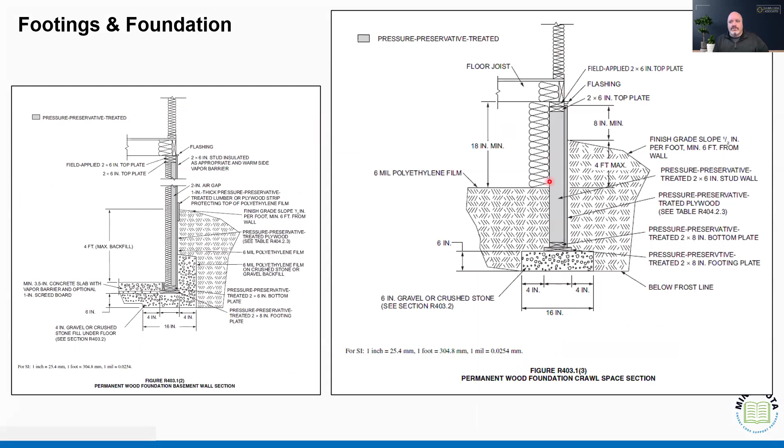So jumping to some examples, what we're looking for is, where is the location? We know the code identifies that we need to put that on the exterior side. So when we see it identified on an interior surface, what should we say? No, right? We need to have it on the exterior side or integral to the wall itself. So as a planner, I'm looking for these types of scenarios to respond and say this does not comply with section 5.5.3.3.

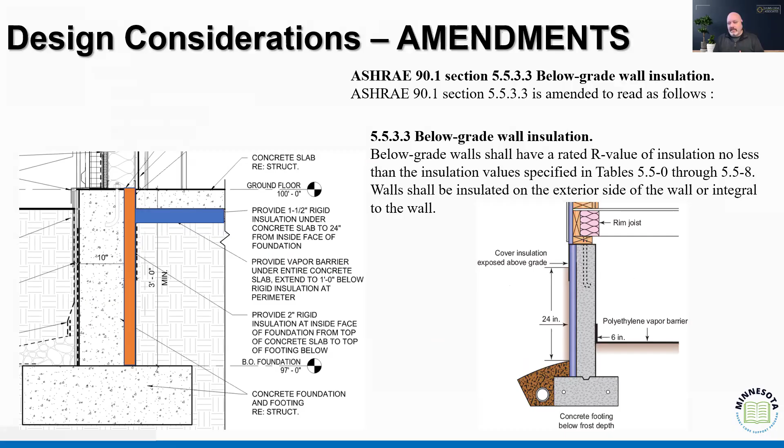Under the prescriptive requirements. Now, we may need to think about, and I don't know what the intention was, but if this is something we want to make mandatory, then it goes in the mandatory section, not in the prescriptive section. Same concept here. So if I'm going to install it, I'm expecting it on the exterior, not on that interior side.

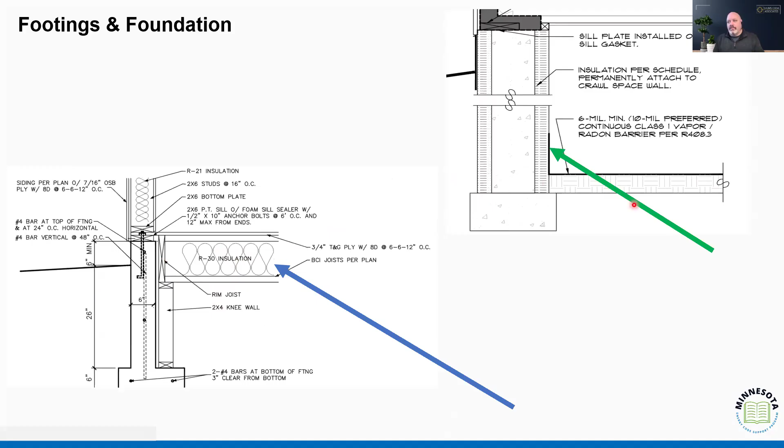Understanding when I'm looking for different insulation associated with that floor system, am I looking for wood, steel, or a mass wall system, floor system? When is it going to be part of a crawl space or some other below-grade wall, and what are those expectations? Am I okay with this type of design that incorporates a portion above grade, a portion exterior, and a portion interior?

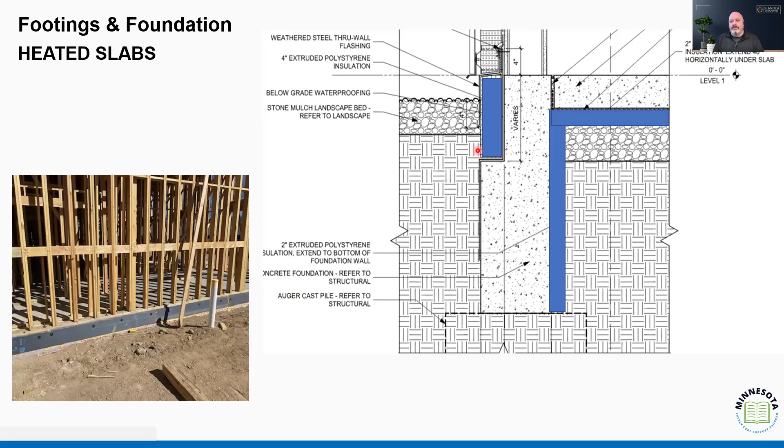Now, to me, this is going to be one of those you're going to have to find. You're probably going to go with the trade-off calculation, not a true prescriptive 5.5.3.3 requirement. But I need to understand, this one here shows a building that's got a bunch of different fire separations we see there, but it's the intent of the exterior walls to be that continuous thermal envelope.

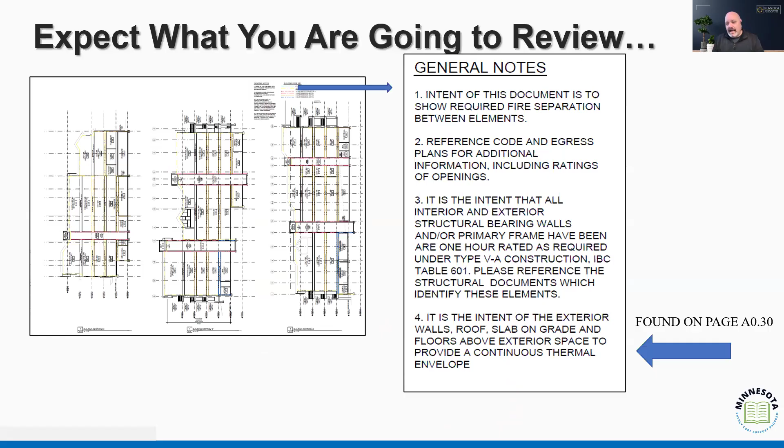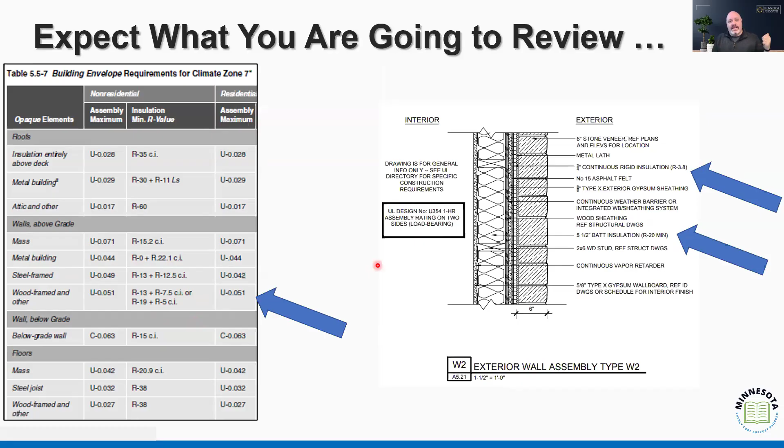We need to know where it's at, so that way we can evaluate each of these systems and see on the plans, are they part of a thermal envelope? How does that thermal envelope, this 3.8 and R20, match with my R19 plus 5? Well, if I'm going R-value, it doesn't match. I need to see what that U-factor calculation is going to be so that this matches.

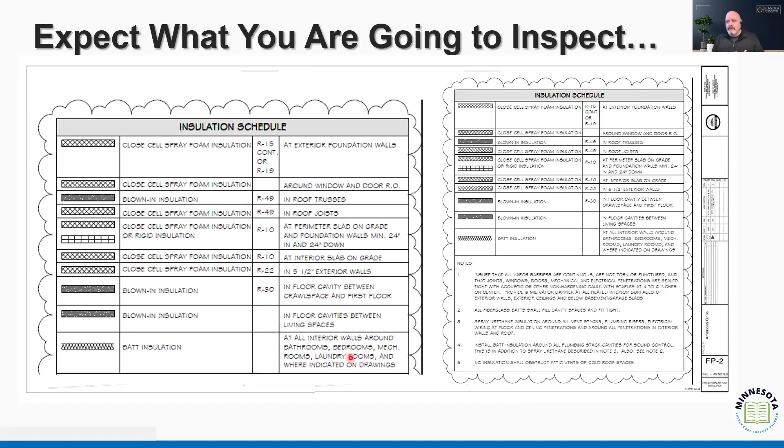A thing I see all the time, especially with bigger projects that have a lot of different details, because they're tired of writing in R19, R19, R13, is this insulation schedule. They'll put it in this kind of schedule with the iconography or symbols to tell you what it means. Make sure that that's completely filled out. We don't want to have a batt insulation that, what does it mean? We don't know. But part of it is also recognizing, what is it for?

Is it there as this batt insulation for plumbing stack sound control? Okay, then it's not part of my thermal envelope. So maybe that's what I need as a note, over here, that this area, this type of insulation is not part of thermal control, it's part of sound control. And again, we install things for a variety of different reasons.

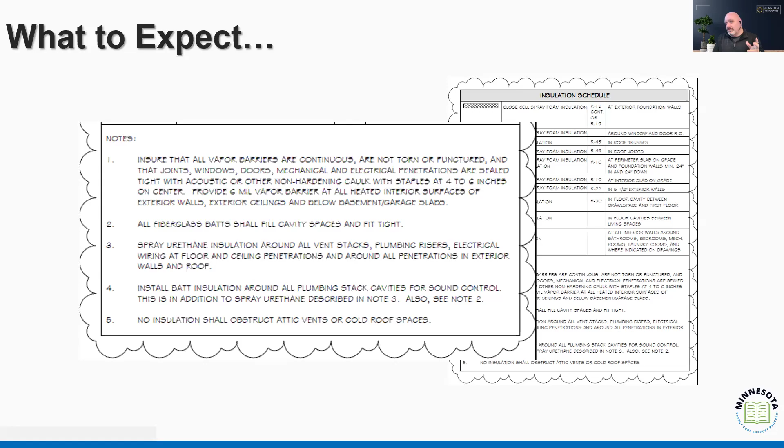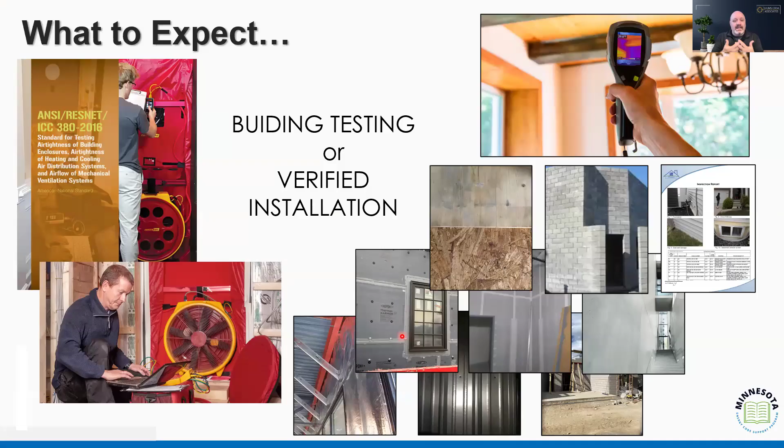I know that was a lot of different things to talk about, and I've got some extra slides, but one thing we need to think about is how this all works together to be part of an air control system. Insulation doesn't work alone, it works with an air system, and it's part of that expectation of what we're testing to make sure our buildings work effectively. Next week, we're going to get a little bit more into the concept of the inspection itself.